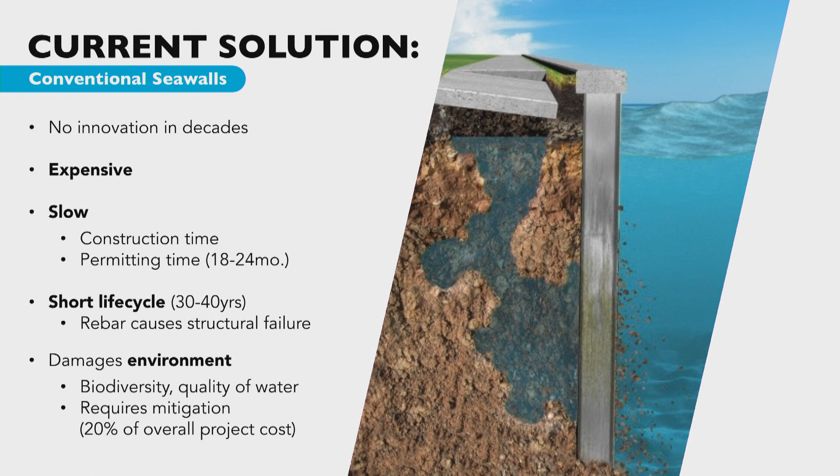One of the biggest challenges is that these seawalls are also very expensive. In Miami, it's like $2,000 to $3,000 per linear foot. They're very slow to construct and to permit. It can take up to 2 years to permit a seawall project. They have a very short life cycle, 30 to 40 years, and they have a negative impact on the environment.

After you install a conventional seawall, within 1 year, 45% of the biodiversity leaves and the quality of water goes down. Because of that, contractors have to mitigate. The city and state require mitigation, or an offset of the damage they're doing through environmental mitigation, and that costs 20% of a seawall project.

So we looked at this problem through a totally different lens, not as a construction company, but as a technology company. We employed the technology of 3D printing, and that enabled us to have freedom of design. As you can see, the panel is not flat.

It has amazing multiple habitats. At the bottom, there's a crustacean cave for lobsters and crabs. Above that, there's a coral zone that's underwater, an oyster zone between high and low tides, and at the very top, it will be a green wall using mangroves.

It's also modular and expandable, like Lego pieces. So when you install this seawall, as the sea levels rise, you can remove the cap, add an extension, and put the cap back on. The cap is not flat, like you saw in the previous slide—it has a C shape, so it actually deflects wave energy. This would not have been possible with molds, but with 3D printing, that's something we can do.

It also has built-in sensors, so it tracks essential water quality data, like pH levels, toxins, microplastics, and algae, and we're making this with no rebar. Not only does it have all these benefits, we can also do it cheaper and faster than a conventional seawall. So, yay!

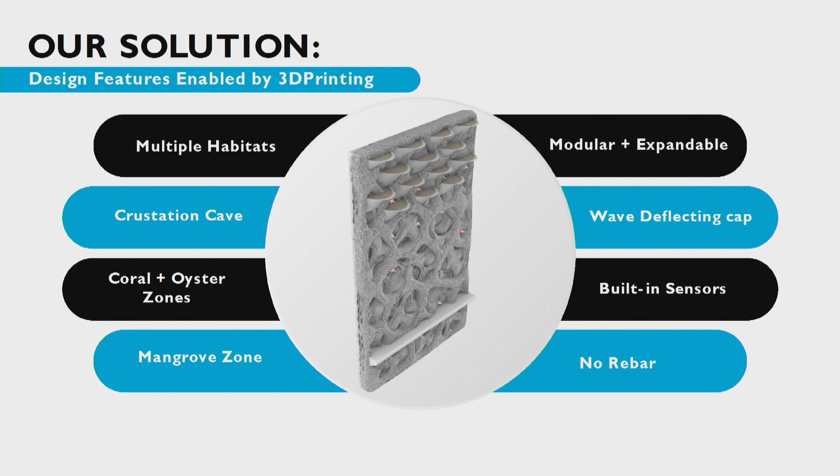So that is the most important slide. This was a GIF, it was really cute. It was printing the wall, but it's okay.

You can imagine it. So it has incredible economic and environmental benefits. And to us, the economic part is extremely important. To have a scalable solution to address this challenge, we have to have the economics first, and the environmental is the bonus.

Because we don't have to mitigate, our panels are self-mitigating. We're automatically saving 20% on every seawall project. It's much faster to manufacture. And something that's very exciting is there's a huge cut in the permitting process. A permit can take up to 2 years, but 90% of that time is spent on all the back and forth with the environmental mitigation. Since we don't have to do the mitigation, we cut 90% of the permitting time, which is awesome.

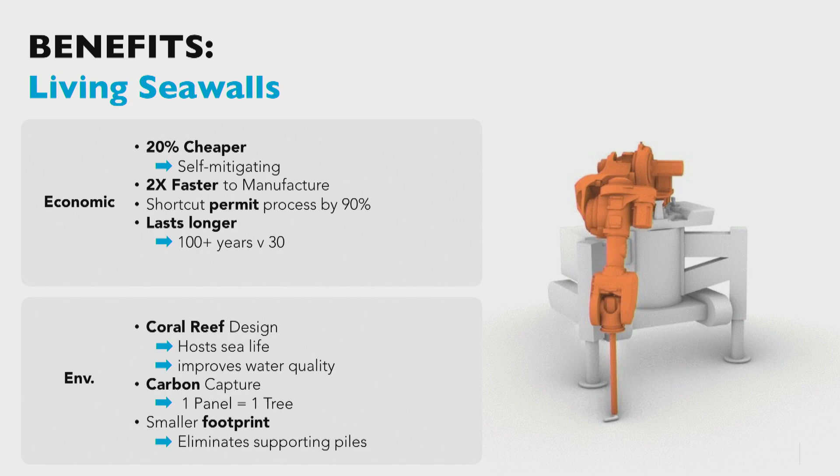And a seawall lasts much longer because we don't use rebar. Rebar is like these metal poles you see in construction zones, and underwater they expand and pop the concrete. Without rebar, concrete lasts forever, like Romans built things with concrete that's still around. So our seawall panels, because they have no rebar, can last over 100 years.

And we're doing that through a special pattern that we can do with a 3D printer inside the panel, like a geometric corrugated pattern.

And then the environmental bonus is that the seawall functions as a coral reef. It hosts sea life, improves the quality of water, and captures carbon. Each panel is like a tree, it captures 40 pounds of carbon a year. And it has a small footprint because we also don't use piles, but we'll be using soil nails.

And the market is huge. Miami is an amazing place to be, it's where we're based, and it's the first city to really face this challenge at scale. But there are 507 cities worldwide at risk from rising sea levels, and conventional seawalls are just cost prohibitive. They're planning to just migrate entire communities. So we really need an economic solution.

The U.S. Army Corps of Engineers published a report saying that they will spend $416 billion in the U.S. alone in the next 20 years on seawalls, $76 billion just in Florida. And also, just to mention, this is definitely an essential purchase. So no matter how well or not well the economy is doing, the sea levels are going to keep rising, and we need to keep purchasing seawalls.

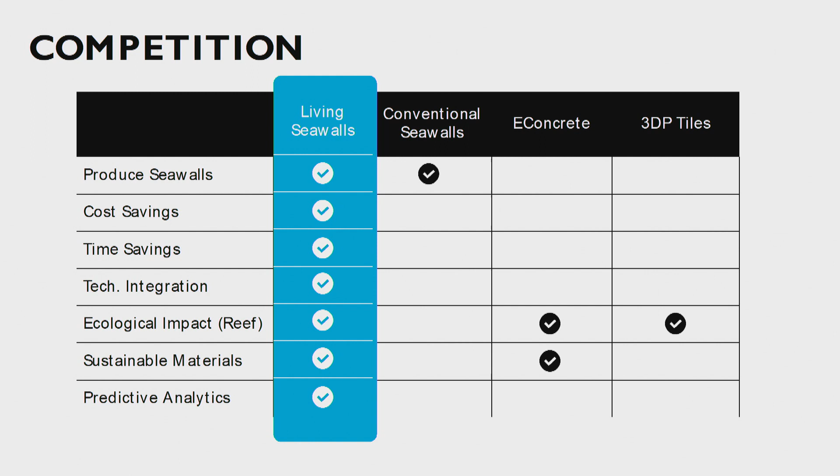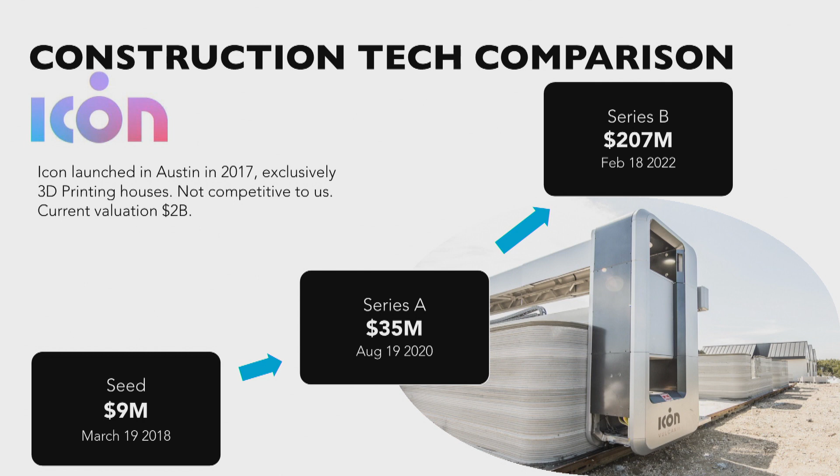Finally, I want to end with this, to show you what's going on in the construction tech market. This company, Icon, many of you know, based in Austin, launched in 2017, focuses exclusively on 3D printing concrete houses. Their first seed round was $9 million in 2018. They raised $35 million in 2020, and just finished a raise of $207 million, with a valuation of $2 billion. So we are planning to follow a similar trajectory. It's a really exciting place to be.

If you are interested, or know anyone else interested in doing something amazing for this community and for coastal communities worldwide, we would love to talk to you at the reception. Thank you.

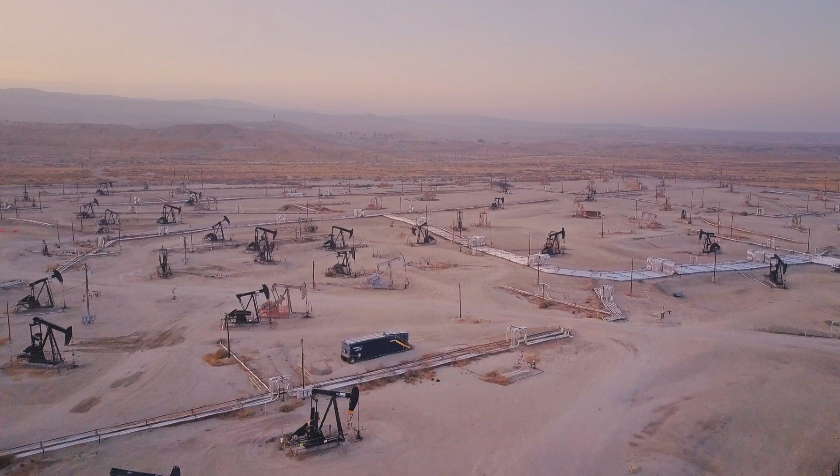As I said, they provided an incredible resource for a long time, but most of them have stopped producing. And as we enter a phase where we now understand some of the repercussions of the oil and gas we've been consuming, this speed at which these wells are going inactive is only expected to increase. And we're left with a situation where we have a lot of wells abandoned by society, doing nothing unless they're polluting, which many of them are.

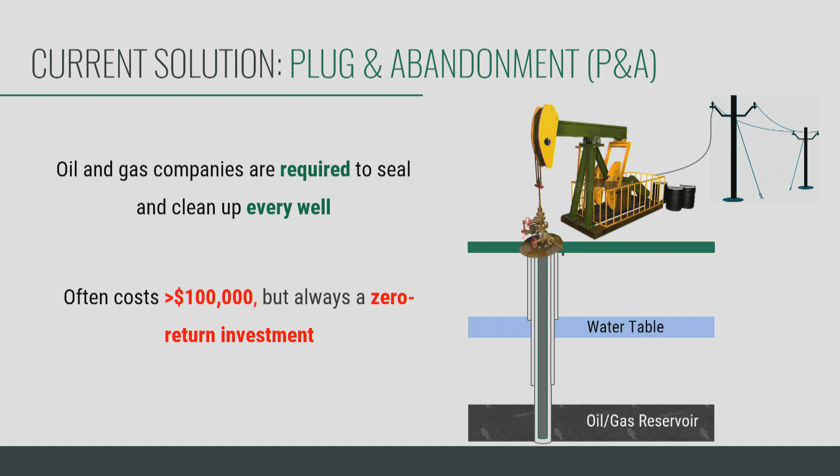So what should happen at the end of an oil well's life? In reality, it is required by state law to clean up every well that a well owner has. What that looks like is you remove all the surface equipment, take out the tubing from inside the well, put a bunch of cement in.

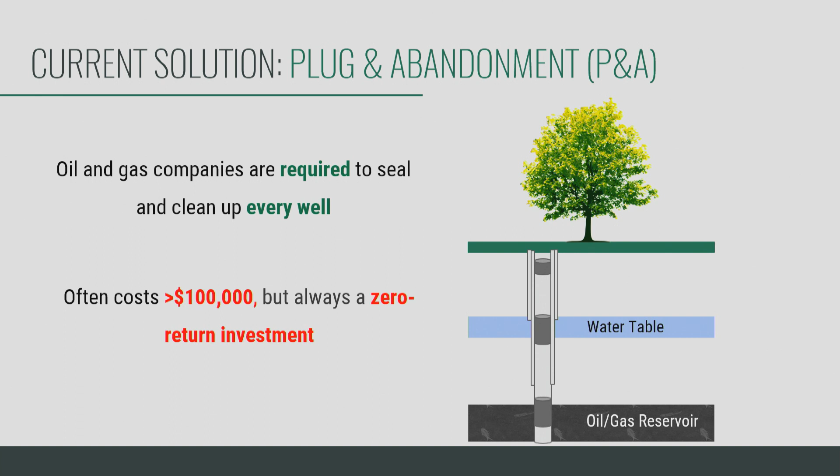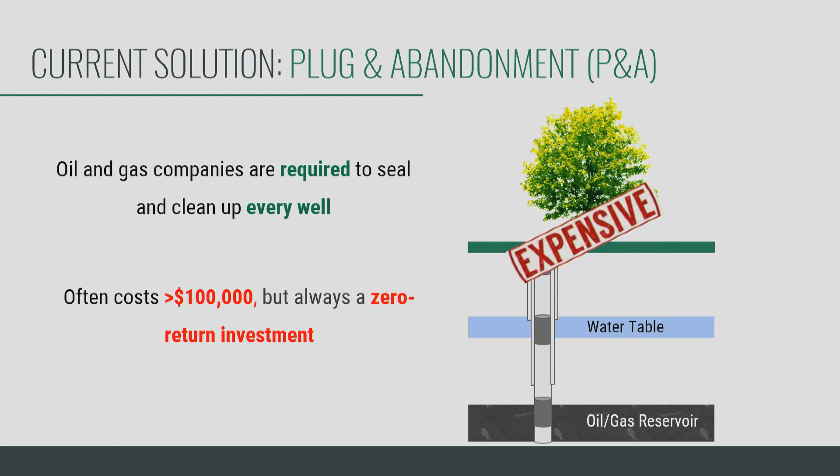Rip off the wellhead, tear out some casing from the surface, and remediate it back to what it was. There are two really important aspects to this: it's extremely expensive, and there's no return on this investment. So these oil and gas companies aren't incentivized to do it, and they don't want to, and they're pretty good at avoiding it, to be honest.

This has created a situation where we now have more than 2 million inactive oil and gas wells across North America, many polluting, and at best doing nothing at all, with about 1 million more on the cusp of becoming inactive. Each well is expensive, but multiplied by millions, it's a crazy amount of money needed to solve this problem, daunting even for governments—we're talking hundreds of billions of dollars. And the time regulations allow us to complete it is more than 100 years.

I promise this does get a little happier soon. But unfortunately, we don't have that kind of time. These wells are leaking methane, a massively potent greenhouse gas, so we need to change something soon.

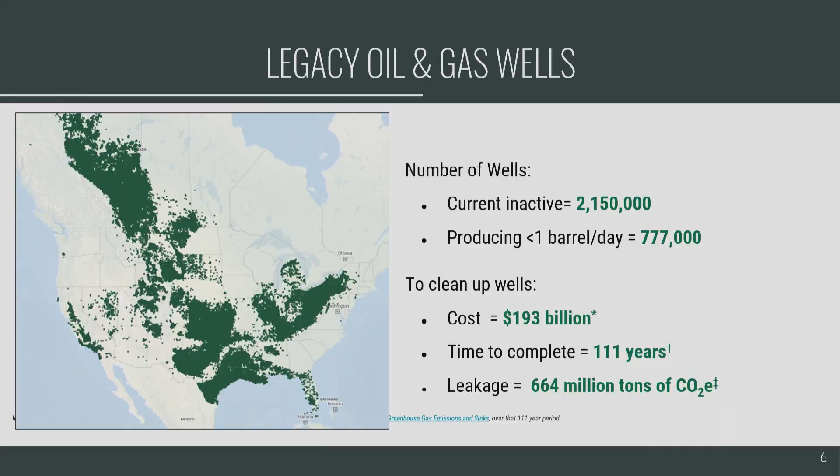So what we want to do is change this narrative, create a new story in which, instead of being viewed as liabilities, these inactive wells are viewed as a resource. I'm Stefan Streckfus. We are Renewell Energy, and we are creating oil wells that end well.

So how we're going to do this is we sought out to find a market we could pair with this resource. We identified gravity energy storage, and we think it's the absolute perfect complement. Gravity energy storage is exploding as a market, mainly because it's an incredibly flexible energy storage resource. It allows us to take the energy produced when the sun is shining or the wind is blowing to times when we want to consume it, when the wind is not blowing and the sun is not shining.

Within that space, Energy Vault is the most developed company. They recently SPAC'd for about $1.6 billion, and we essentially do the same thing they do, but instead of above the ground, we do it underneath.

What makes these wells a particularly interesting resource is how they play into the physics of this situation. For gravity energy storage, you need three things: mass, gravity, and height. Height is where these wells really excel. The average gravity energy storage company either creates or accesses somewhere between 100 and 500 feet of vertical displacement. The average oil well is over 1 mile deep, so every kilogram we suspend is massively valuable—pun intended.

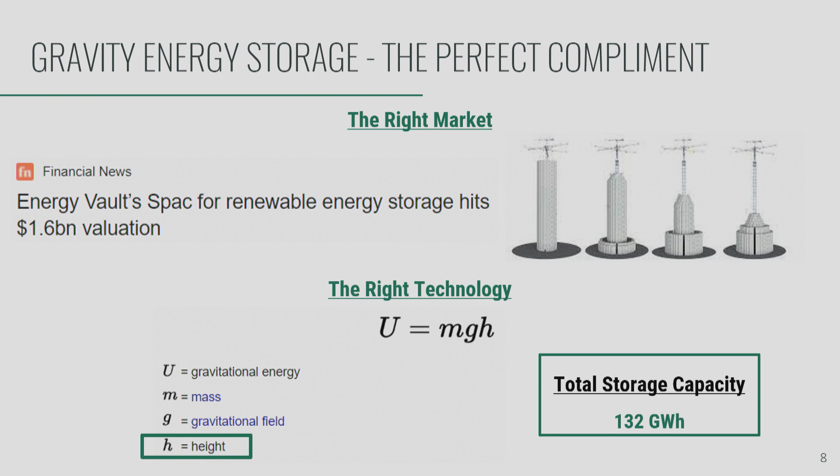The way we do this—I'm going to start at the bottom of the slide to confuse you guys and keep you on your toes—first we go in, clean up the well, and seal it with cement. This is really important because it's the remediation service we provide. We also monitor it to make sure that if anything goes wrong, we're able to fix it quickly.

Once we do that, we build a long cylindrical weight within the well. To store energy, we lift that weight to the top of the well, essentially converting electricity into potential energy. We store it until the sun goes down and people want to turn on their ovens, or whatever the grid needs in that location. Then we lower that weight, which turns a generator on the surface, putting electricity back on the grid.

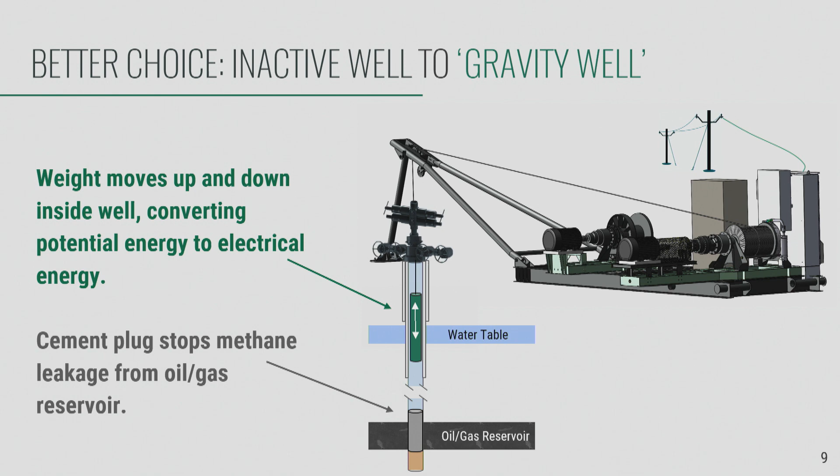So what effect does this have in these markets? Well, you can think of it this way: we've created one technology that plays in two different markets at the same time, so we're effectively subsidizing our entry into both markets with our entry in the other.

If that's confusing, what it means is that on the energy storage side, we're by far the lowest cost energy storage available, and on the well remediation side, we're much cheaper than it has ever been in the past to clean up a well.

There are also a couple other benefits. On the energy storage side, we seal the well whenever we install, and there's a lot of methane leaking out of these wells. That allows us to be the only directly net negative greenhouse gas emissions energy storage technology on the market, which is really important as we seek to deploy a lot of energy storage to support the deployments of wind and solar coming in our near future.

On the plug and abandonment side, not only are we the lowest cost, but because we're putting in gravity energy storage, we also create a revenue stream that wasn't there before. So we can share some of that revenue with the well owner and create a payback on something that never had any return before. It's a world where oil and gas companies are incentivized to clean up their wells.

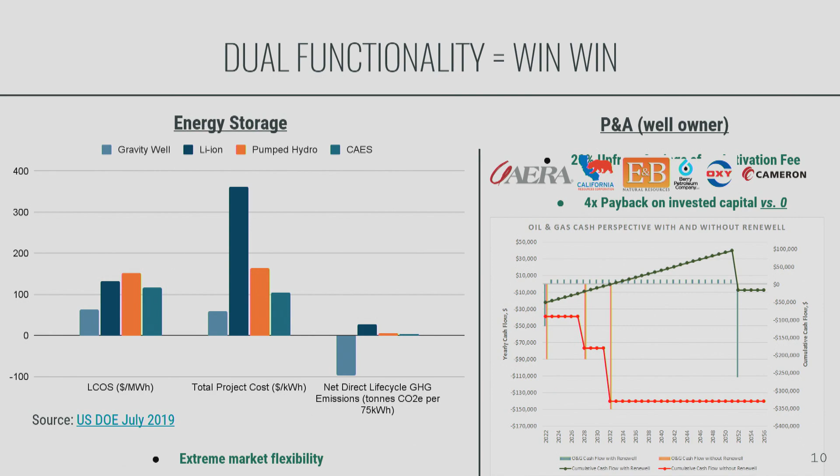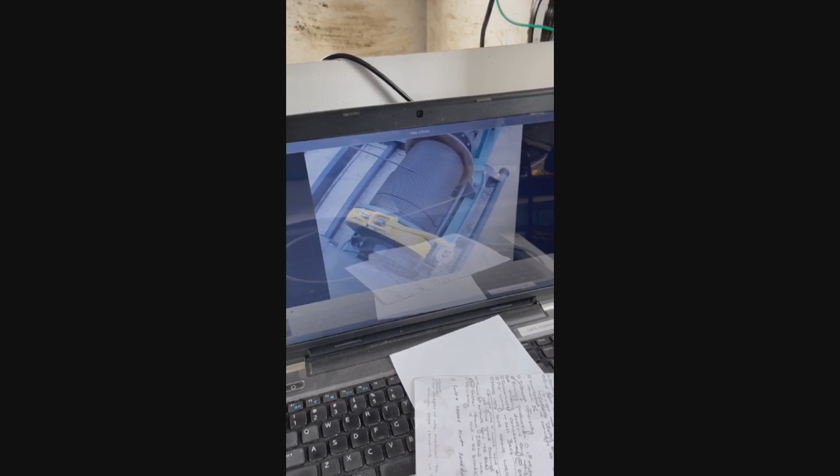This is our fearless CEO, Kemp, giving you guys a little tour. We've built one of these things — this is our first prototype/pilot. She was out in a field in Sanger, Texas. Had a great test out there for a couple of months.

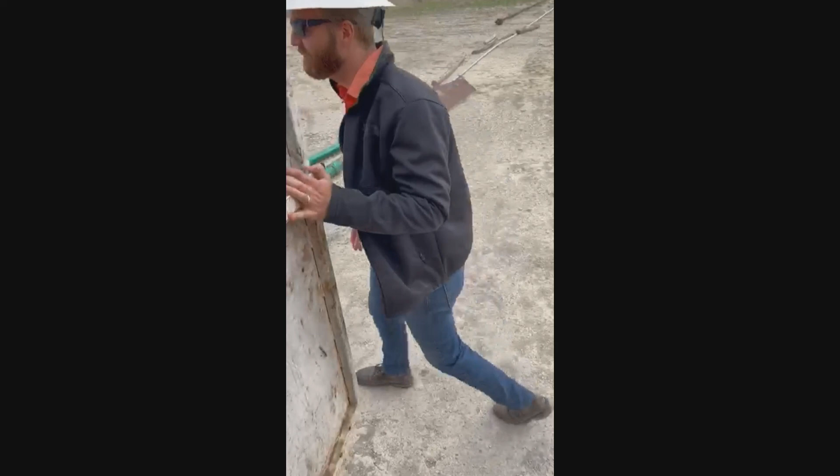We've just uninstalled her for a couple of upgrades. And I'm saying her because she actually has a name — we call her Artemis Prime. We're a team of engineers, so we had to do something lame at some point.

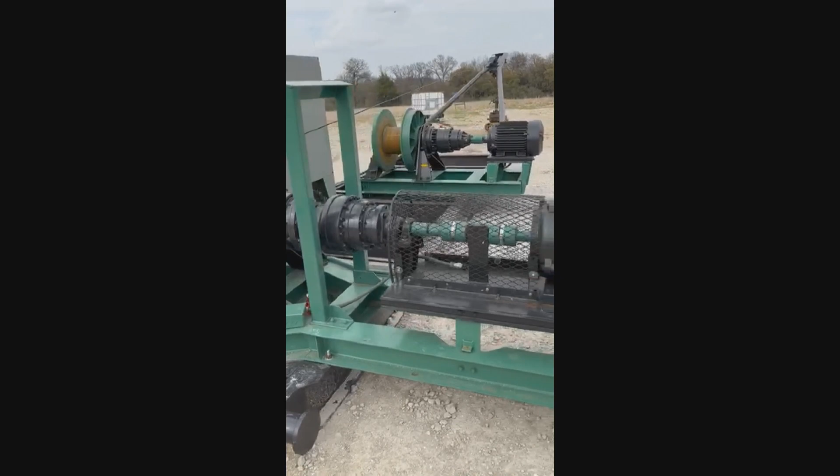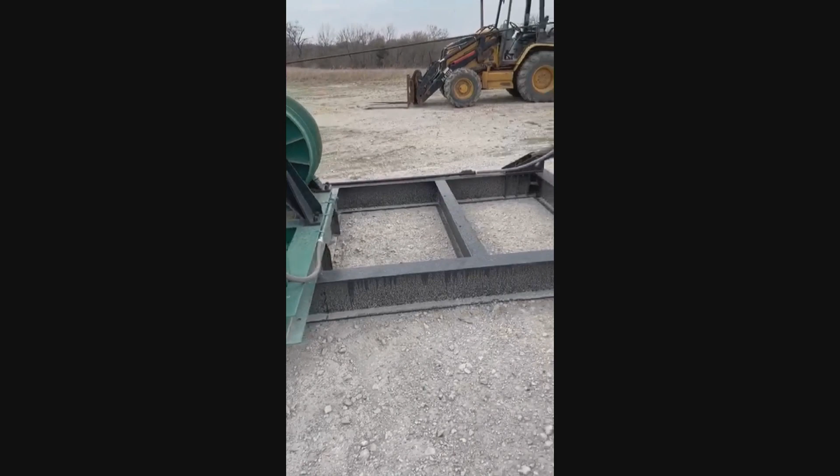On the screen, you can see there are two winches. One of them is not operating — that's just because this originally was a testing station, because we wanted to play with this thing a lot before we stuck it in a well and suspended a weight and took any risk.

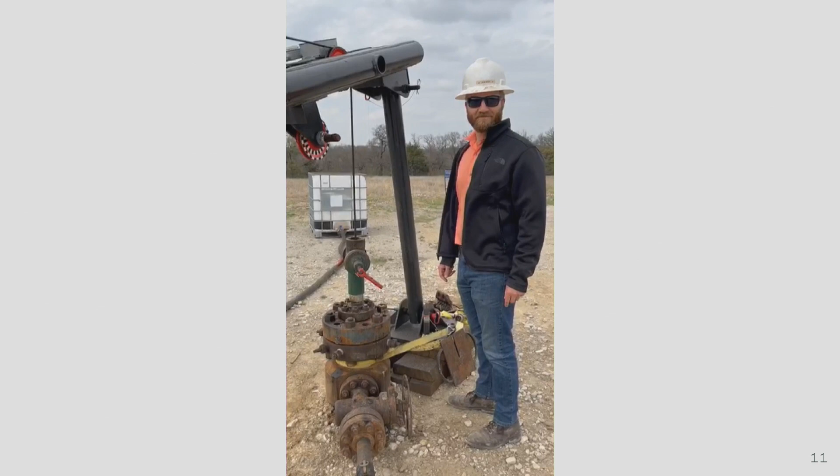Artemis Prime stuck as a name because we thought it was funny and we like it. But it's also functional in that what you're seeing there actually all folds up into a contraption that's sort of like the car form of Transformers, can go onto the back of a trailer. We can then ship it across the country and install in different wells, working with different customers to make sure we're meeting their needs.

Era Energy is where we're headed in a couple of months for our second pilot installation, and that one will be in California. Getting into market size, I don't want to spend a ton of time here.

I'll just say skip to the far right and the serviceable, obtainable market. Once we've filtered out all the wells that don't make sense because they're not the right geometry, or they're too far from an energy storage market, or maybe there's no electrical infrastructure in that particular location, we still end up with a more than $4 billion per year market we're accessing just on the energy storage side.

The economics are definitely what makes a business run, but the reason we really think this is going to be successful is that this idea unites a lot of disparate communities. Whether it's an oil and gas company, a utility, environmental activists, or renewable energy project developers, this is a technology that everybody benefits from.

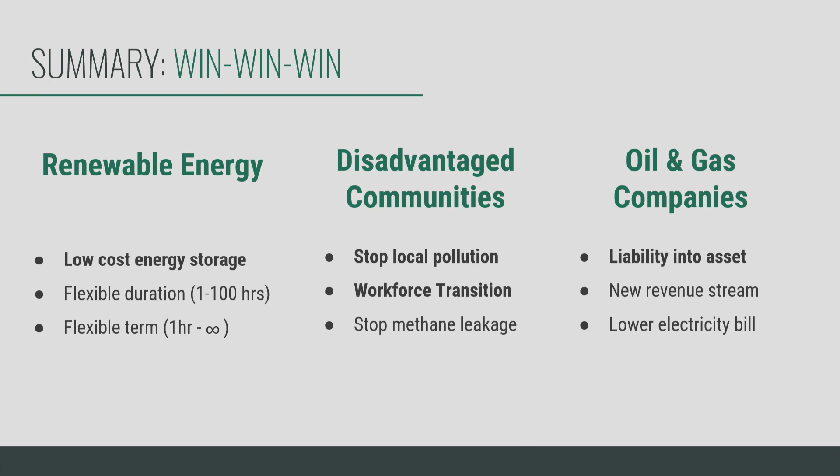One really important aspect is that we actually impact a variety of disadvantaged communities, whether it's the people where we're installing the device who have had local pollution coming out of these wells previously, or the blue-collar workforce in oil and gas that, as we transition to a renewable energy economy, need a new job. We help a lot of different groups.

Just in case there are some potential investors in the crowd, digging a little deeper into the revenue potential here — as I mentioned, $4 billion, that is currently inactive wells, only the viable wells of those inactive wells. If we want to think a little larger and shift over to the wells currently active and the wells currently being drilled, all of which will become inactive some day, we end up with about $10 billion per year.

And if you're really a dreamer, which we definitely are, the rest of the world should be included, and that comes out to about $15 billion per year in energy storage revenue.

And with that, I would like to invite any of you actually, there should be one more. All right, well, I'll do it without the slide.

We've got a really beautiful team that you guys can't see, but I promise exists, that we've been super fortunate to find and gather together over the last couple of years. A couple months ago, we learned that we were granted $3 million to develop this concept by ARPA-E. Over the next few years, we'll be working with Renewell to do that. But at the end of the day, we do want to move faster, and because of that, we'd love to chat with any potential investors, partners, or collaborators in the audience and invite you to join us on our mission to convert oil and gas's largest liability into renewable energy's greatest asset. Thank you, guys.

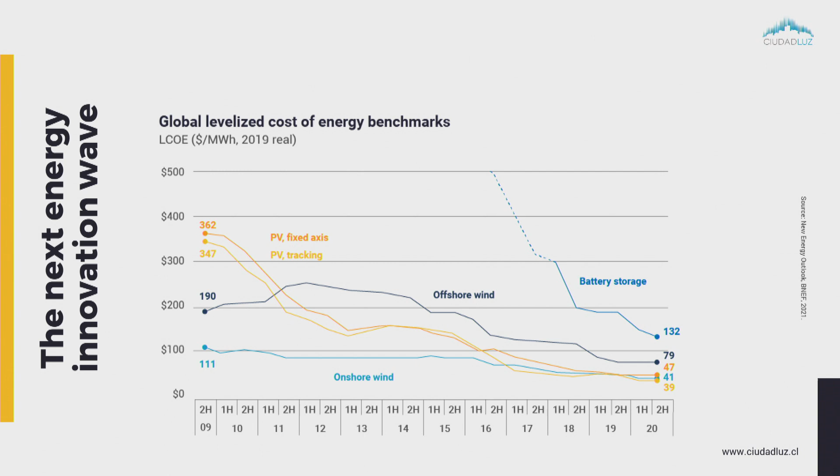So let's see what we have done. We started 6-7 years ago, in Chile, then moved to Colombia. We have installed nearly 50 megawatts of projects, representing 20% market share in both countries, and we are now ready to install the next 50 megawatts in Chile and Colombia, and starting to explore other countries.

But the key element of our market model, our business model, is the way we finance projects. We designed a financial model for commercial and industrial installations, which we have implemented over the last 3 years. It's fully operational, has invested more than $15 million, and is now investing the next $30 million.

But we wanted to move from commercial and industrial installation to the residential sector. So last year we developed a new financial model for homes, which is already prototyped and tested and is ready for full deployment from this year on. And we've created a private fund, which already has $15 million of investment commitment.

We have grown and gone through 3 different capital rounds. We have raised around $1.5 million from private investors, and we have also been supported by innovation grants from governments. We are a healthy, financially healthy company now, with revenue sales of around $2 million and growing at a rate of 50% a year.

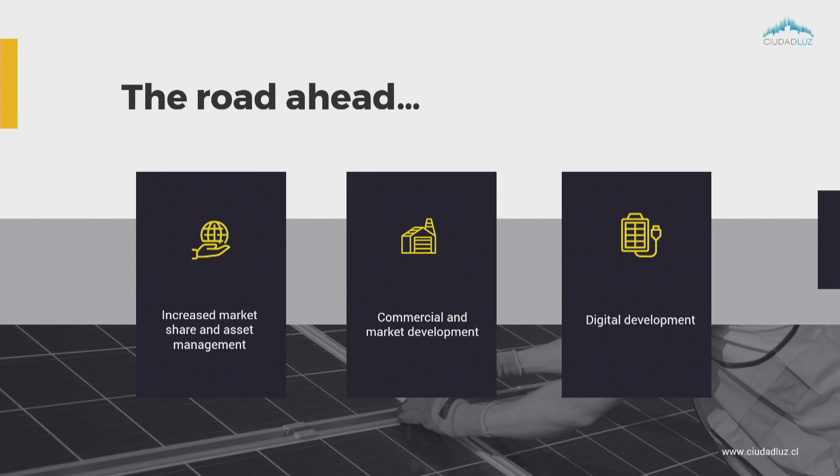But to do so, we need to develop new energy services based, obviously, on PV, but also on storage and digital intelligence. So we will increase our market share in those markets, we will increase our ability to get into this market, but more importantly, we will develop our digital tools.

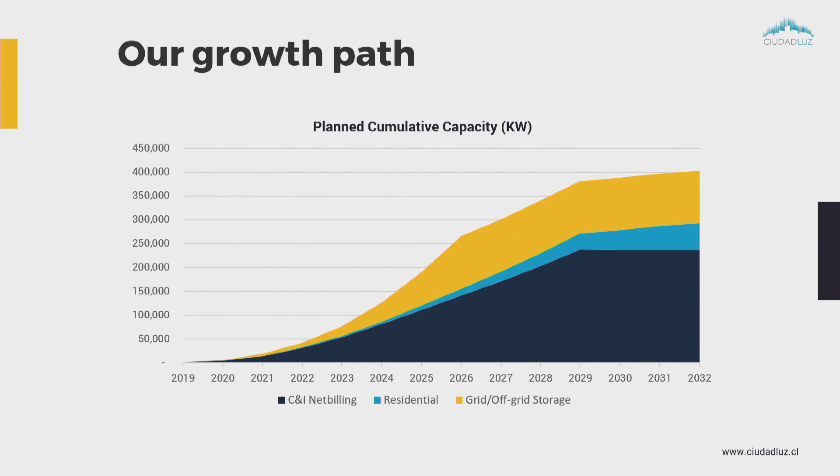We will face challenges. We need to develop decentralized energy solutions based on digital asset management abilities. We will provide independence based on energy storage solutions at multiple scale and places. And we will need to empower our customers to actively participate in the new energy markets that are emerging in the future.

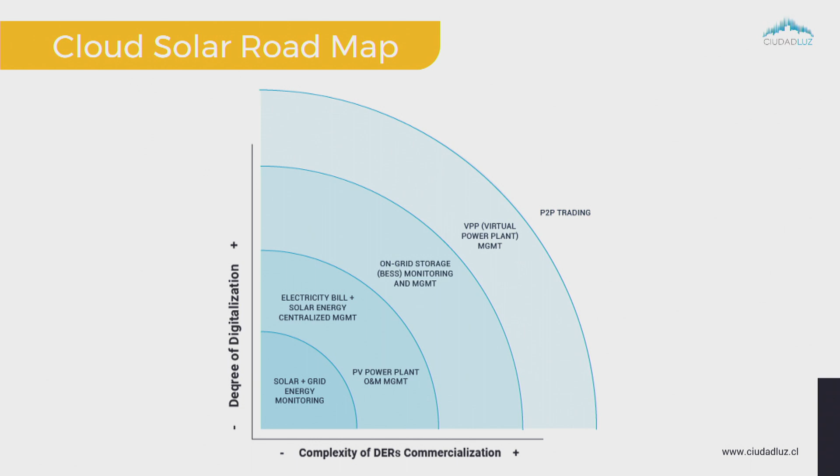So cloud solar is the key resource for constructing this future energy system. As the degree of digitalization grows and distribution electricity markets get more complex due to the penetration of distributed energy resources, we will be able to start developing new services from what we do now up until the management of storage assets, virtual power plants, and even peer-to-peer trading in the future, which will altogether create more value for the company, our customers, and all our stakeholders.

So let me end by telling you who we are.

So now we are a company of more than 50 people working in Chile and Colombia. We have more than 6 years of commercial operation with a very multidisciplinary team, people with a lot of ability in energy, technology, finance, project management, and so on.

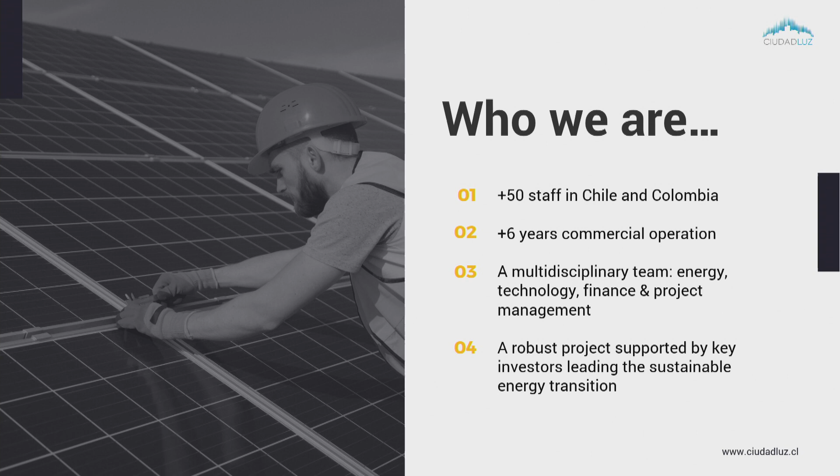And we have been supported by key stakeholders in the region, particularly people coming from the energy sector. And we will continue expanding in these new markets.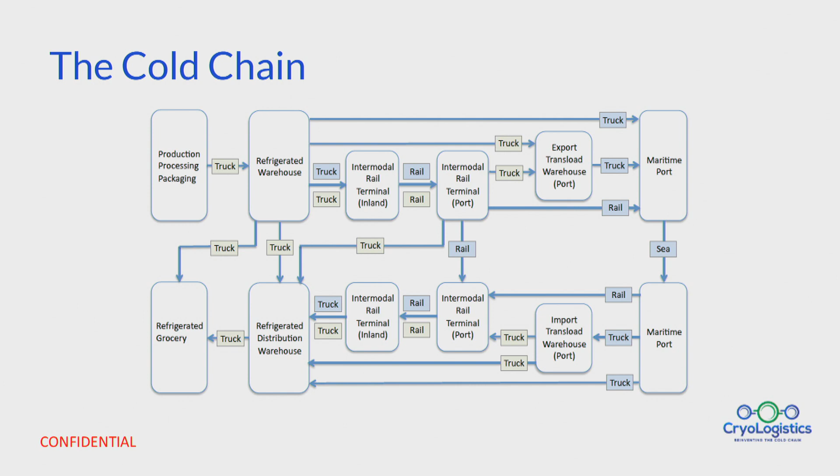This is known as the cold chain, and as you can see, it's a very complicated network of people and things that are required to move your product through the supply chain to its final destination. It's a very complex, expensive, and inefficient operation, but it is what we rely on today to receive our food, our pharmaceuticals, our vaccines, all the things that we depend on for life today.

The inefficiency I talked about has one outcome, and that is waste. There's a tremendous amount of waste produced in the cold chain because of the multiple touch points that your product has to go through before it reaches the consumer. About 35% of all consumable food product produced in the world never reaches the table. And in some countries, and in Canada believe it or not, that number is 58%.

58%, in a first world country. Hard to believe. The International Air Transport Association estimates that about $34 billion worth of vaccine every year goes into the dumpster. As you know, vaccine is very temperature sensitive. We all have learned that.

And again, the mechanism for moving that product through the supply chain is deeply flawed. All of that waste also contributes to global greenhouse gas emissions, as does the transportation sector. We intend to solve that.

My team of engineers and I have developed what we call the Snowship solution. This is a vacuum insulated pallet container that allows you to put your product in a secure environment and ship it across the supply chain, no matter how far it has to go, maintaining the exact temperature set point required by your product to within half a degree.

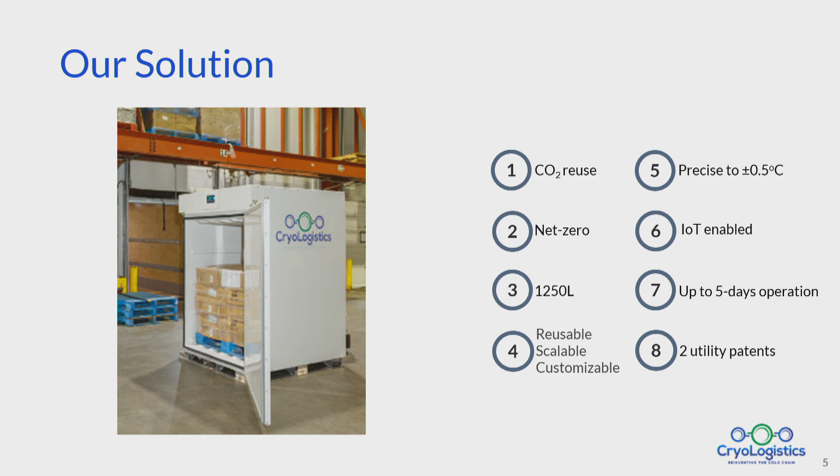This is a carbon dioxide reuse technology, meaning that we use liquid CO2 that is recovered from waste gas, and using our proprietary heat exchange mechanism, and this is really where the genie in the bottle rests.

We can control the phase change characteristics of liquid CO2 from a liquid state to a gas state to a solid state, known as dry ice, in the form of dry ice snow inside a sealed heat exchanger that is positioned within the load space of the snowship.

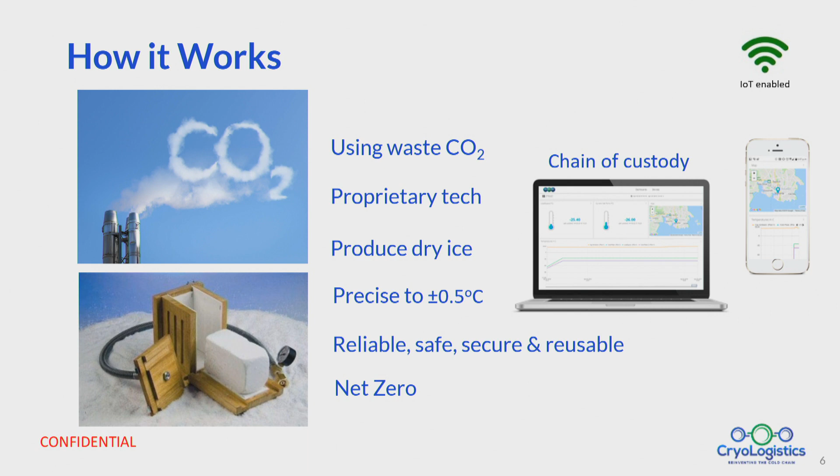As I said, we can control temperatures from ambient to as low as minus 35 Celsius and hold those temperatures to within half a degree.

One of our goals is to create value from waste. We know how much CO2 is being produced by industry, and where is it all going? It's going into the atmosphere. It's not all bad, however. CO2 is used in many manufacturing and production processes. We also need it to breathe, right? So it's in use today in a variety of industries, and we are simply capturing it for natural refrigeration.

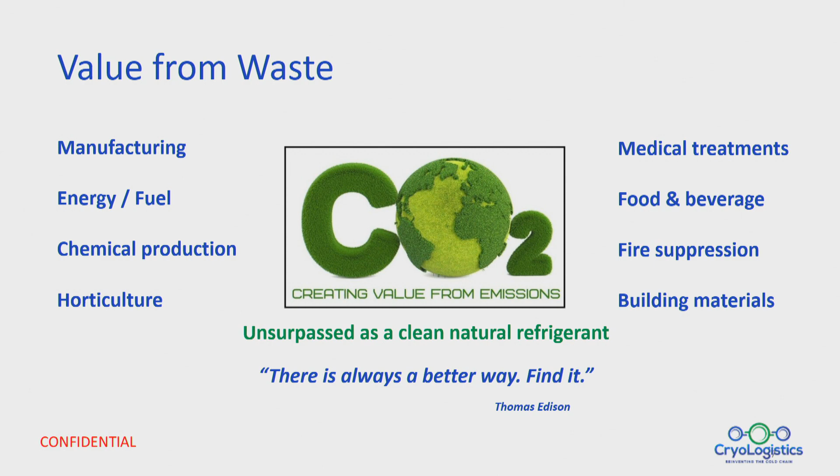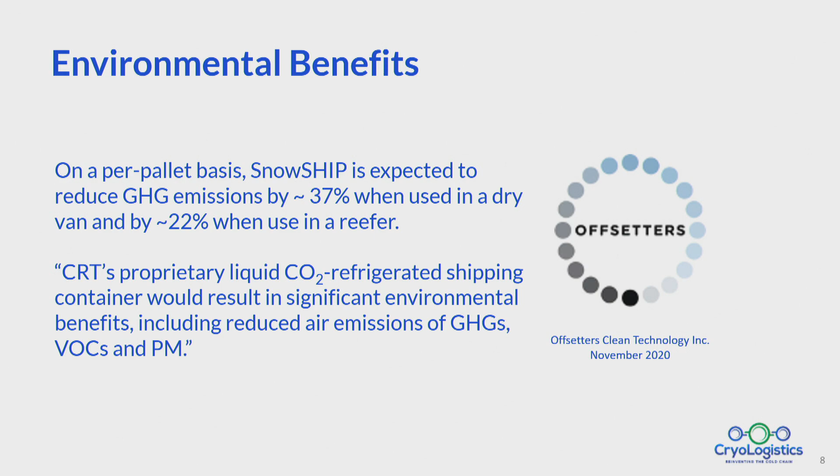It is unsurpassed as a natural refrigerant. We've had an independent study conducted of our technology, and it found that the snow ship, on a per pallet basis, will reduce emissions in the transportation sector by up to 22 to 37%. Now, one of those trucks you see on the road with that reefer unit mounted on the front can carry up to 24 pallets. So think of 24 of our units in there at 22 to 37% emission reductions per unit.

Our technology addresses 9 of the United Nations Sustainability Goals. We've had this study, and as I say, it's been verified. So we're very excited by that.

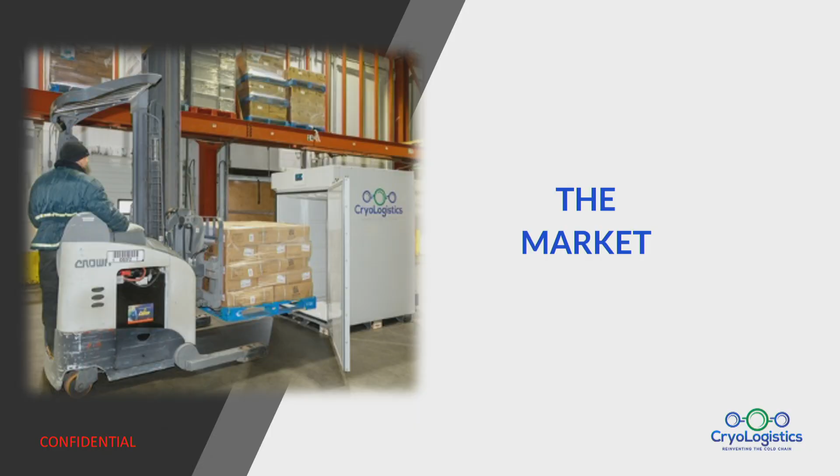The market for our technology is global. Think about food, pharmaceuticals, vaccines. Cannabis has now become a commodity that is being shipped in temperature control units. These are all regulated, high-value products that are perishable. They are time-sensitive with complicated handling requirements. Again, think about the cold chain. And they are being moved through a mechanism that is underserved and ripe for disruption.

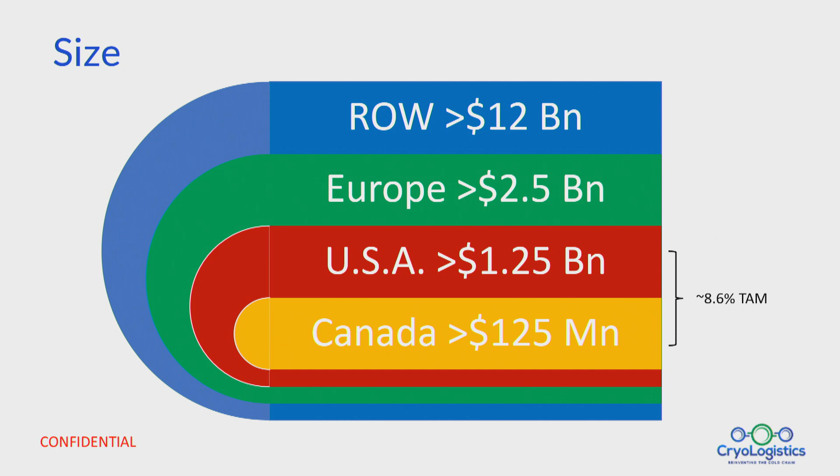In North America, the market opportunity for our technology is about $1.5 billion. And the rest of the world totals about $12 to $15 billion. So we are in the commercialization phase now. We are working with companies in Canada to pilot the technology, and in doing so, we're able to understand what the pain points in the cold chain industry are. We're seeing all of these impacting the efficiency, the operation, the profitability of these companies.

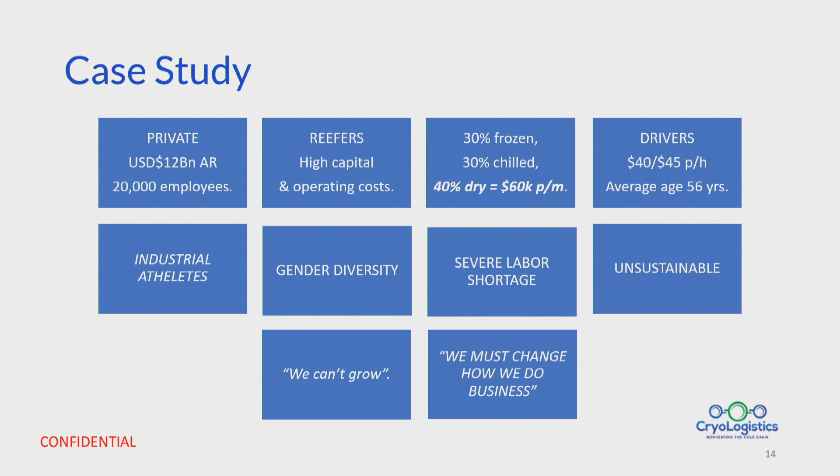One very large food service company we're working with, a North American company, is telling us that they cannot grow. And as you know, if you don't grow in business, you die. This organization is working with us to develop the technology to fit into their operation in a way that will allow them to reduce their dependence on what they term as industrial athletes. These are large men who can lift heavy loads repetitively and work in a cold environment in a terminal warehouse at night, and they're having a very difficult time with labor shortages.

They're also striving to increase their gender diversity and reduce their fleet of 350 refrigerated trucks to zero using our technology. That company represents upwards of $250 million in business opportunity for our company. It's one of the top 5 food service companies in North America, which together represent a very significant opportunity. They operate on a herd mentality, where one goes, others follow. So we're working with this company to introduce the technology in the United States this year.

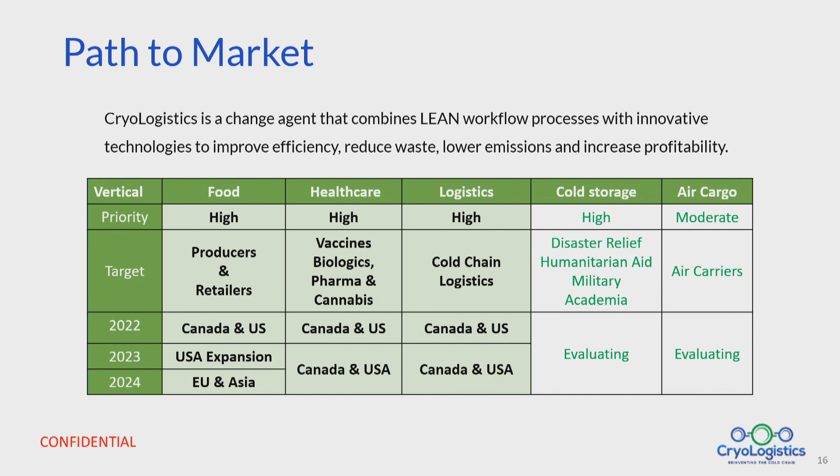Our path to market is to address the pain points within the cold chain as they apply to those industry verticals I talked about earlier: food, healthcare, surface logistics, cold storage, and air cargo. I mentioned the revenue potential for North America and Europe.

We're in an equity round currently. We've raised to date $8.9 million in non-dilutive funding and equity. We have the support of the federal government; they have provided $5.3 million worth of non-dilutive funding, R&D grant funding. We continue to get more money from governments at all levels.

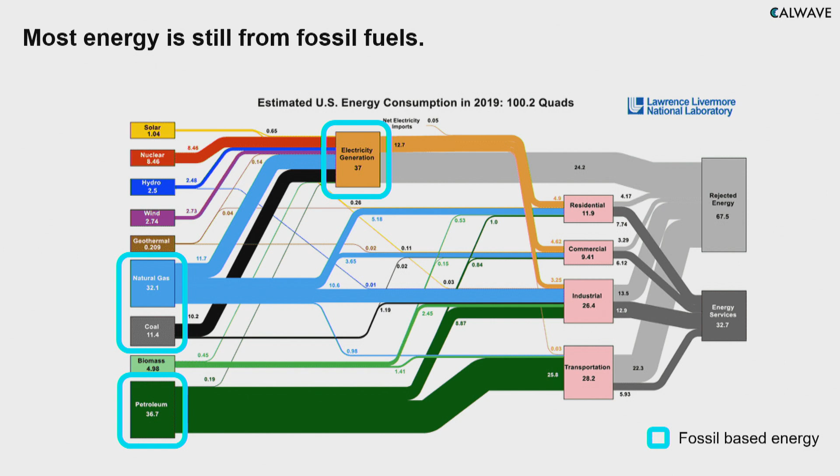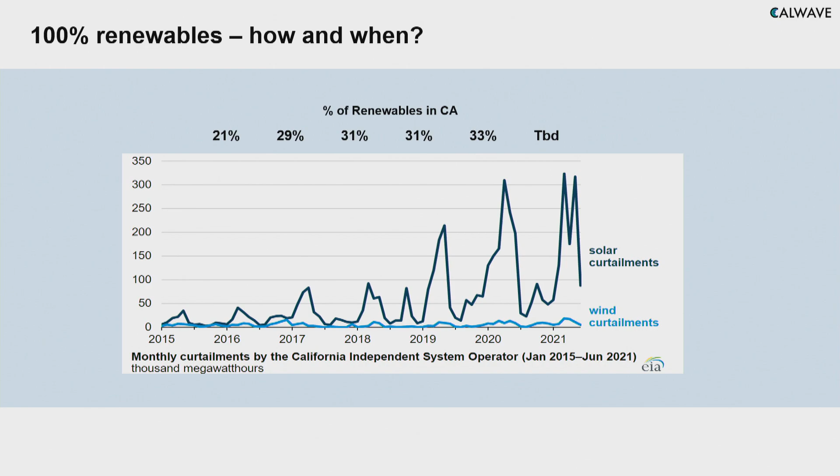Right now, curtailment rates for solar and wind are both on the rise, and our oil and gas infrastructure needs to be replaced by baseload renewable resources.

And this is where wave power comes in. It's more consistent, it's more predictable, and it's much more dense than both wind and solar. So while the sun doesn't always shine and the wind doesn't always blow, the ocean always makes waves.

So the DOE has predicted that waves can power 30% of US power demand. And given the significant populations along each coast, wave power is already close to demand centers.

So a key word to think about when thinking about wave power is baseload. On a day-to-day basis, the capacity factor on average for wave power never drops as low as for solar or for wind. On an annual basis, wave power actually peaks in the winter, while with wind it depends on where you are, and with solar it always peaks in the summer.

At the same time, wave energy and offshore wind can share a significant portion of their infrastructure, so we can actually increase the power output and flatten the power production profile of offshore sites without significantly increasing costs.

But let's step back in time a few decades. In the 80s, there really was no dominant design for wind turbines until the 3-blade horizontal axis wind turbine emerged as the dominant design for a few reasons. It's the most efficient, it has effective shutdown capabilities, and it's scalable.

With wave power, we still have yet to find that universally accepted solution. However, waves and wind have a similar fundamental challenge in that a majority of the energy actually comes in the relatively lower energetic regions. So with waves, we're talking 1 to 5 meter wave heights.

However, wave developers have to prepare for massive storms. So a 50-year return storm creates waves on average 16 meters tall. And in order to prepare for those conditions, they have to significantly over-design the technology, which just makes it uneconomical.

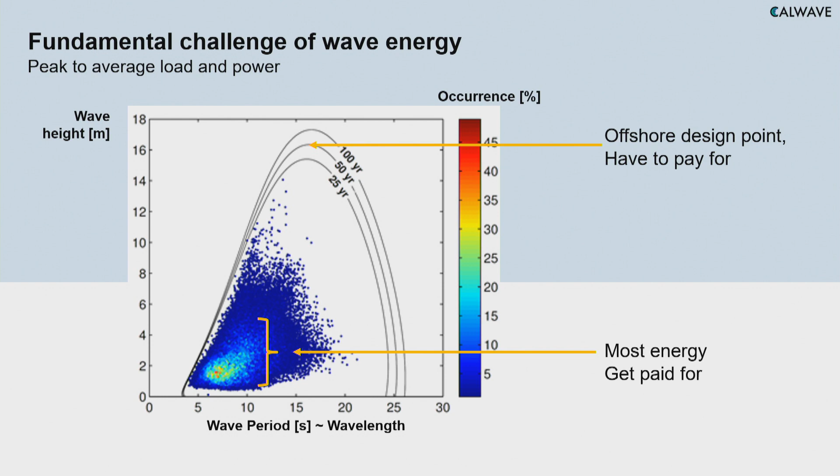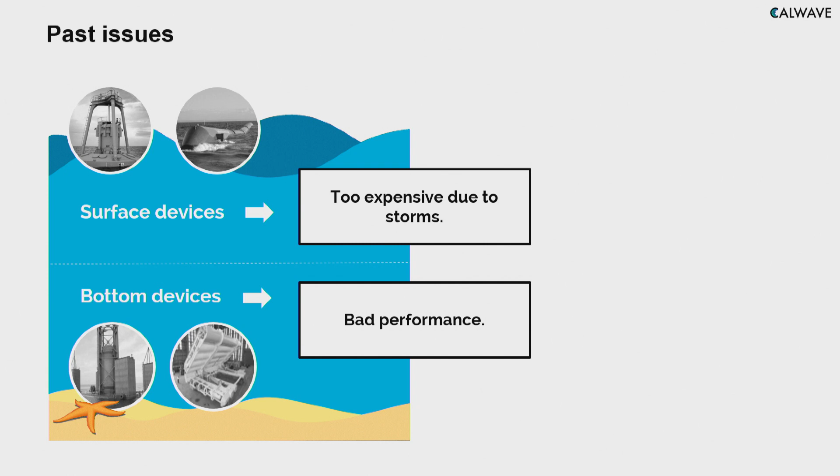As I just mentioned, there have traditionally been surface-going buoys and then wave energy converters on the seafloor, and those both present huge challenges. On the surface, you have to significantly over-design it to the point where it's not cost-effective. When these devices operate on the seafloor, that's far less efficient because you're farther from the waves themselves, and maintenance is more difficult, also making it cost prohibitive.

So in 2015, the DOE launched the Wave Energy Prize. 92 teams applied, and CalWave was one of them, and went through 4 design iterations throughout the competition. And at the end, we were one of 9 teams to be invited to test at US Navy facilities.

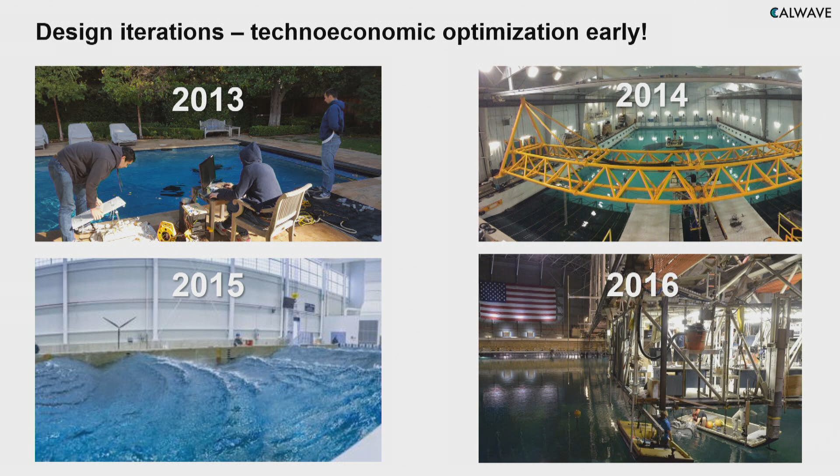And out of this competition, out of these 4 design iterations, CalWave had a revolutionary new architecture. It actually takes the best of both worlds from the surface buoys and the seafloor devices. So it operates directly under the waves, but completely submerged. This allows the technology to generate more power than if it were on top of the surface, and it allows the technology to generate power from multiple degrees of freedom instead of just moving in one direction.

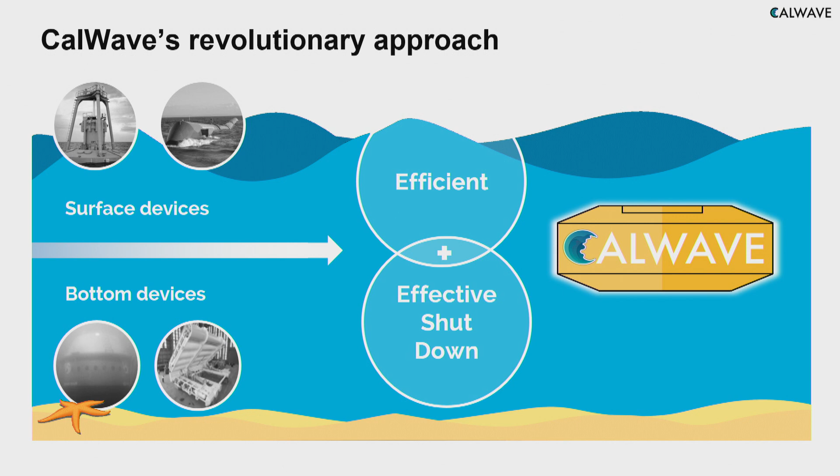However, it can also shut itself down during harsh conditions. So in a way, it can protect itself just like those seafloor going devices. And it actually does this autonomously.

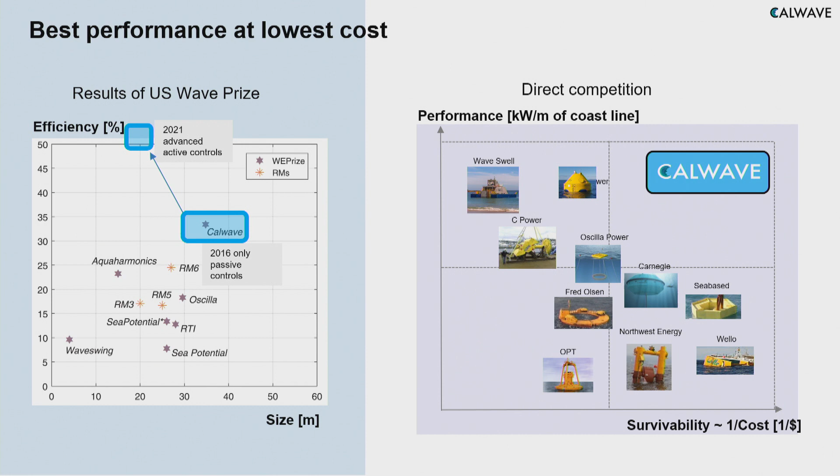Because of these great features, CalWave was a winner of the Wave Energy Prize, and since then the technology has gotten even more efficient. Given it's gotten even more efficient, and given our ability to shut down effectively and autonomously during harsh conditions, we predict that CalWave will be the cheapest producer of wave power on the market.

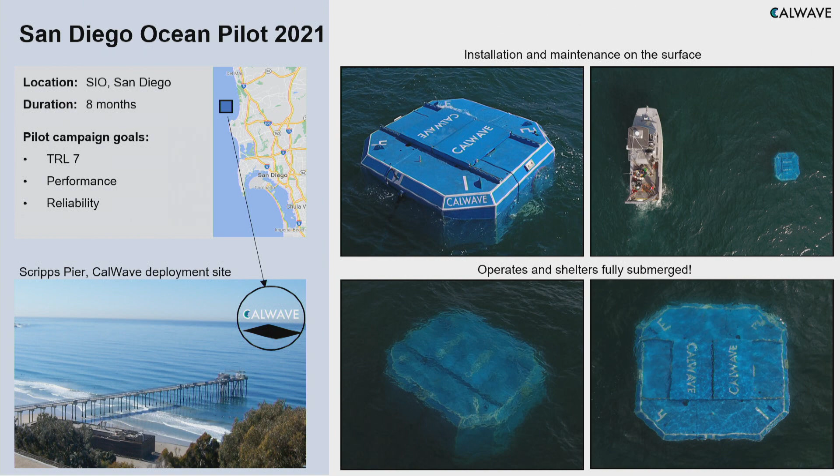It's located about a half-mile offshore, and what's exciting is it's connected back to the Scripps Institution, actually exporting real power.

What's really significant is we've achieved all of our objectives with this pilot. The installation was efficient, only taking an hour and a half. It's been operating autonomously for over 6 months now, since early November, with 99.8% uptime and no decline in performance, only having to shut down during a couple of major storms.

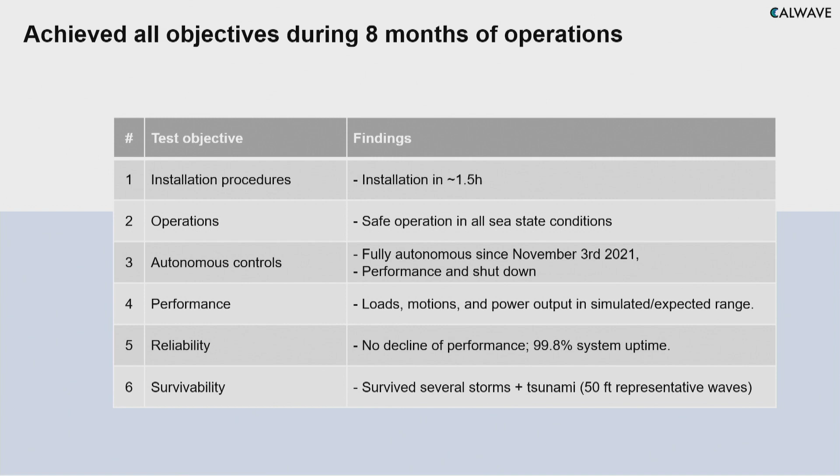Right now we're a team of 7 strong with an experienced board of advisors and numerous partners like NREL, multiple other national labs, UC Berkeley, and many others.

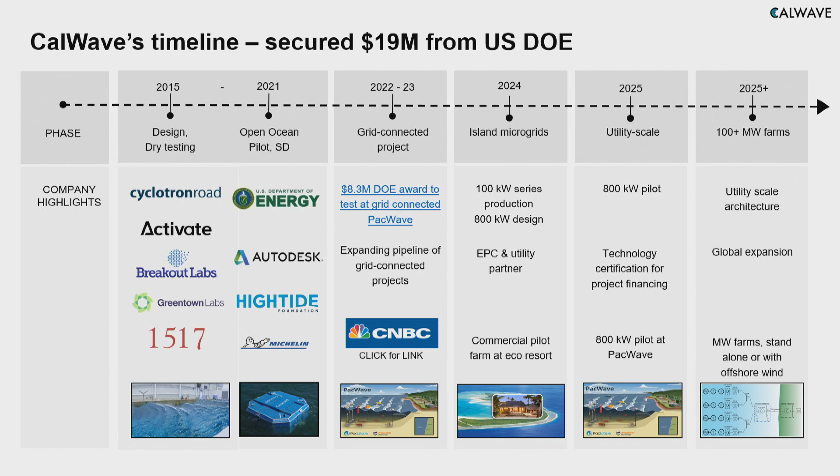CalWave spun out of the UC Berkeley Mechanical Lab, and as I mentioned, secured funding from the Department of Energy and from seed investors, Breakout Labs and 1517, among others. This January, we were awarded a further $8 million from the Department of Energy to expand our system to 100 kilowatts. This is the system that we'll be testing at the PacWave test site in Oregon soon after it opens in late 2023, early 2024.

PacWave is located offshore Central Oregon, connected back to the utility scale electrical grid, so we will be able to export real, significant power to be used by us. In addition to our 100 kilowatt system, we will deploy further devices there in the future that are even larger, and those will be the backbone of wave farms, much like the offshore wind farms that we see today.

Something else we'll be able to prove out at the PacWave site is that CalWave's installations can be done with relatively simple boats, as opposed to the offshore wind industry, where they need very specialized vehicles and even helicopters. So CalWave has 3 product lines, and we're starting this year with the xNode.

With the onboard battery, we can provide continuous power to offshore applications such as autonomous underwater vehicle charging, offshore aquaculture farms, anything that needs power on site that doesn't have to be exported back to shore. The business model here is power and data as a service, so we'll own and operate these assets.

Beyond the xNode is the x100, rated at 100 kilowatts, and this is what we will be deploying at PacWave. It'll be commercialized in 2024, and it will provide power to remote coastal microgrids that, at this time, pay multiple times more just for basic energy needs than we do.

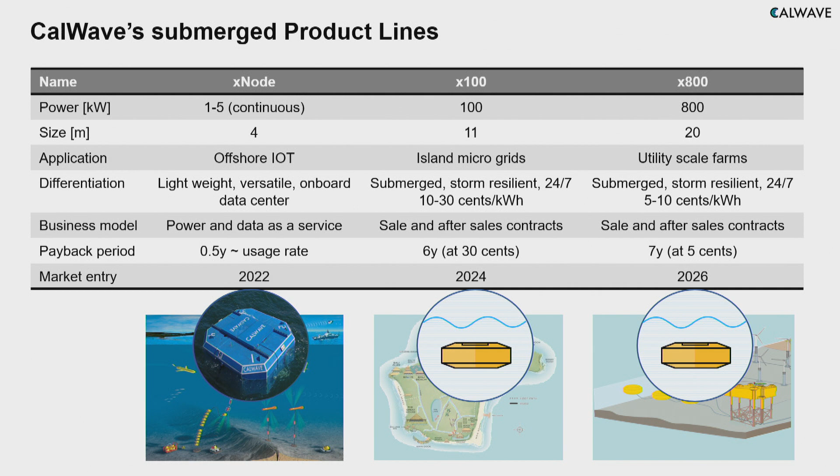So we've identified several entry markets for CalWave, both in the US and around the world. These are all easily billion-dollar markets. Even assuming a modest penetration of wave power into the power generation portfolio, you're looking at an annual $35 billion opportunity in the US and an annual $300 billion opportunity around the world.

We've developed a strong pipeline of LOIs, initially focused on the Americas and the Pacific, and then considering our wider pipeline of both the xNode and the x100, we're looking at all 6 inhabited continents.

So why now? The Department of Energy is really stepping up their commitment, committing $110 million every year for ocean energy R&D in particular. The PacWave test site will be operational in late 2023, and CalWave is signed up to test there first. The offshore wind industry is booming and growing like crazy, and wave energy infrastructure will tie in there, and CalWave is ready to do that.

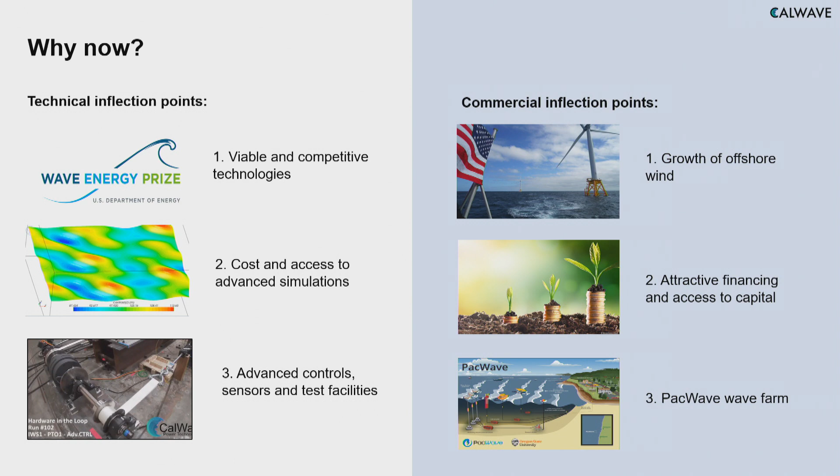But most importantly, in order to decarbonize, we need baseload renewables, and that's what wave energy can provide. That's what CalWave can provide.

So we are in active talks with the investment community.